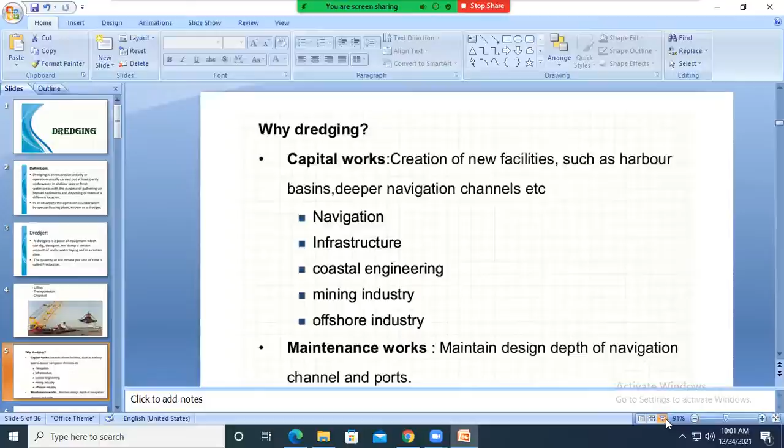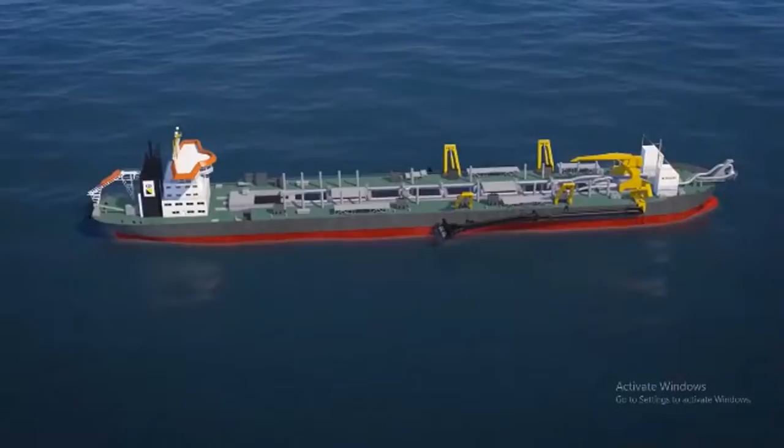The trailing suction hopper dredges of Boskalis are ocean-going vessels that can collect sand and silt from the seabed and transport it over large distances. Boskalis deploys trailing suction hopper dredges for the construction and maintenance of ports and waterways, as well as land reclamation, coastal defense and riverbank protection. Trailing suction hopper dredges are equipped with one or two suction pipes ending in drag heads. When a vessel reaches the dredging location, it reduces speed and lowers the suction pipes to the seabed. The drag head moves slowly over the bed, collecting the sand like a giant vacuum cleaner. A mixture of sand and water is pumped into the hopper of the dredging vessel. Dredging stops when the maximum hopper capacity is reached.

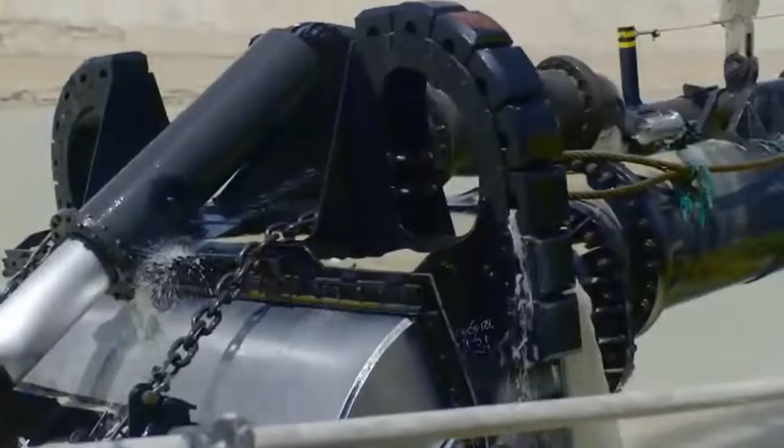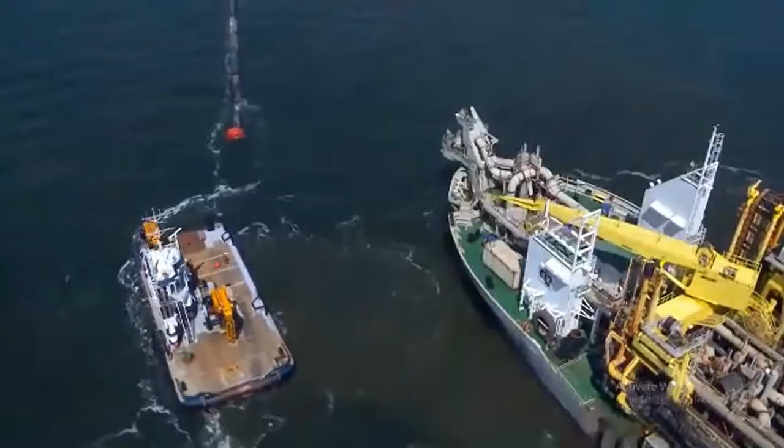The vessel can discharge its load in various ways, depending on the project specifications. The vessel can discharge its load by rainbowing. Rainbowing is used when the vessel can get close to the discharge location and the previously reclaimed sand body is above or almost above the surface. The sand is sprayed through a nozzle in the bow, rainbowing in an arch through the air. Another discharge method consists of pumping the sand ashore by floating or sunken pipelines. This approach is used, for example, in land reclamation or coastal protection projects.

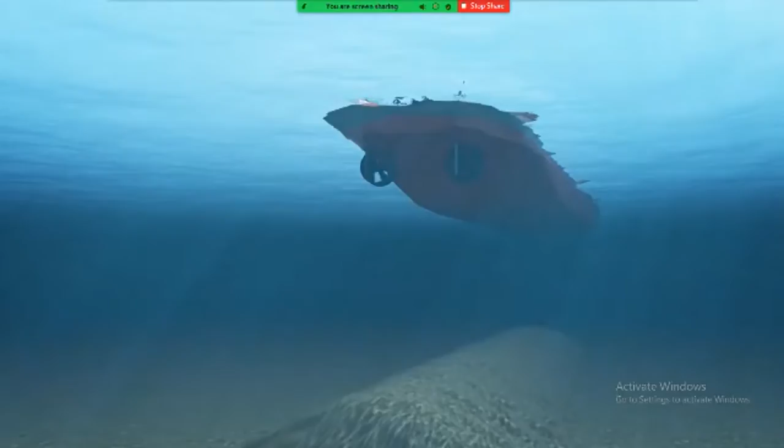The sand is pumped through floating pipelines into the reclamation area. The sand can also be deposited through doors located in the bottom of the vessel. Accuracy is achieved by maneuvering the vessel precisely above the designated location. Boskalis has a large fleet of state-of-the-art trailing suction hopper dredges operating on projects all over the world.

If we compare the roads we drive on to shipping channels, maintenance dredging is equivalent to repairing the road for safe traffic movement. Capital dredging is equivalent to creating road expansions or overtaking lanes.

Dredging activity is regulated by Commonwealth and state governments. Maintenance dredging is usually performed annually and/or following a natural weather event which may have caused siltation, while capital dredging is triggered by demand to expand existing channels or create new ones.

Dredging can be carried out in a number of ways. However, the most conventional dredging equipment includes the trailing suction hopper dredger and the cutter suction dredger. Like a vacuum, the trailing suction hopper dredger is self-contained, taking material from the seabed into the hopper and transferring it to the placement site.

This dredger is typically used for maintenance dredging. The cutter suction dredger, however, is a bagless vacuum which pumps the material directly from the dredging site into the placement area via pipelines. Placement areas vary depending on the dredging type: capital dredging is placed on land, while maintenance dredging can be placed at sea.

In addition to enabling the safe passage of vessels and facilitating trade, which enhances the economy, dredging has allowed GPC to undertake land reclamation, providing the community of Gladstone with Spinnaker Park, the marina, and East Shores, as well as future potential port development land.

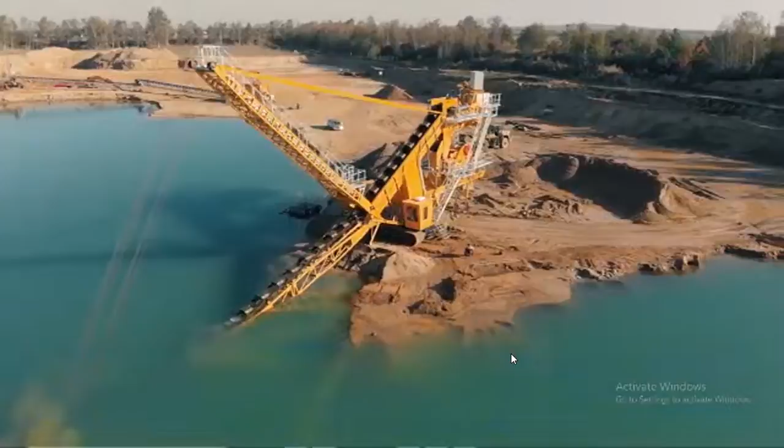Bucket ladder dredging has a series of buckets mounted on an endless loop.

What bucket ladder dredging does is cause the bucket to travel downward in such a way that it scoops material from the bottom and carries it in upright buckets up the ladder to the top. At the top, the bucket rotates into an upside down position and the contents fall into the chute.

Dredging helps in making the water navigable and makes fishing easier, even in shallow creeks. It helps in removing contaminants from the waterway and recreating a damaged area through reclaim work.

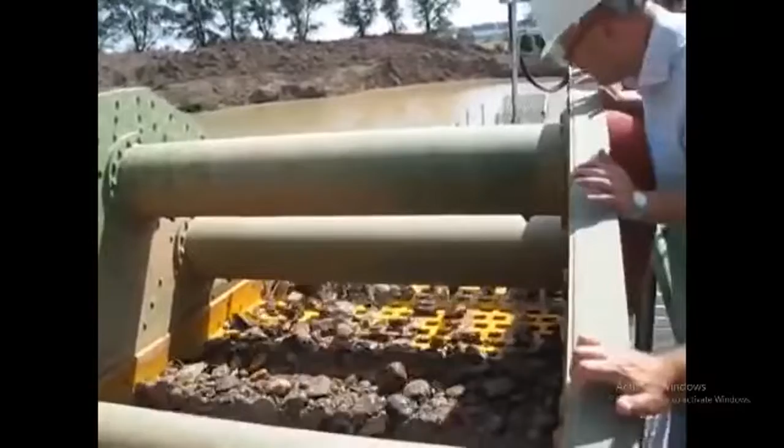Dredging ladder is a floating device for underwater excavation, meaning ladder dredging employs a continuous chain of buckets rotating around a rigid adjustable frame called the ladder.

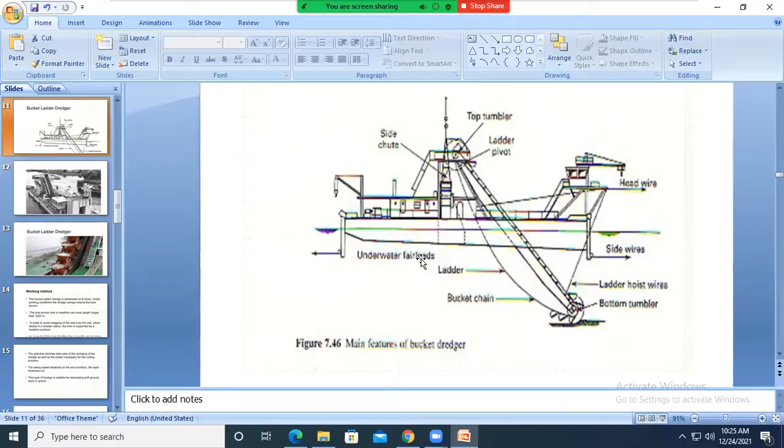How does the bucket dredger work? The loop of the bucket ladder dredger is powered, causing the bucket to travel up and down in such a way as to scoop material from the bottom, then carry the material in upright buckets up the ladder to the top. At the top, the bucket rotates into the upside down position and their contents fall into the chute.

This is the main bucket ladder dredger.

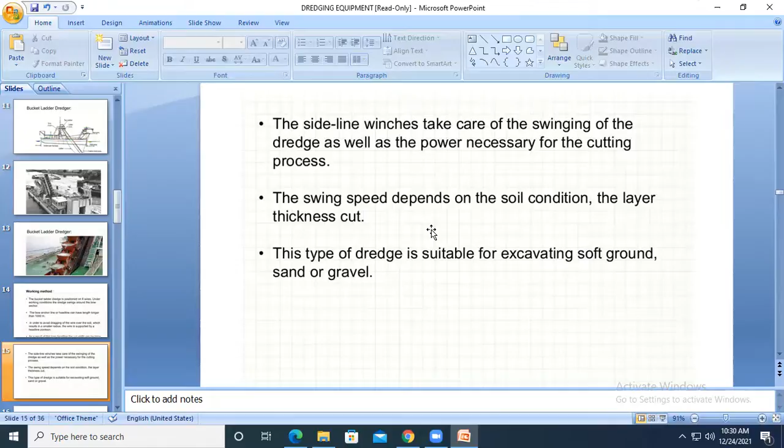Main type bucket ladder dredging capacity - the size of the bucket is usually in the range of 100 to 900 liters. Bucket ladder dredgers in this range are available for dredging almost any material up to the point where blasting is required, and may be fitted with ripper teeth to be able to directly dig into rock.

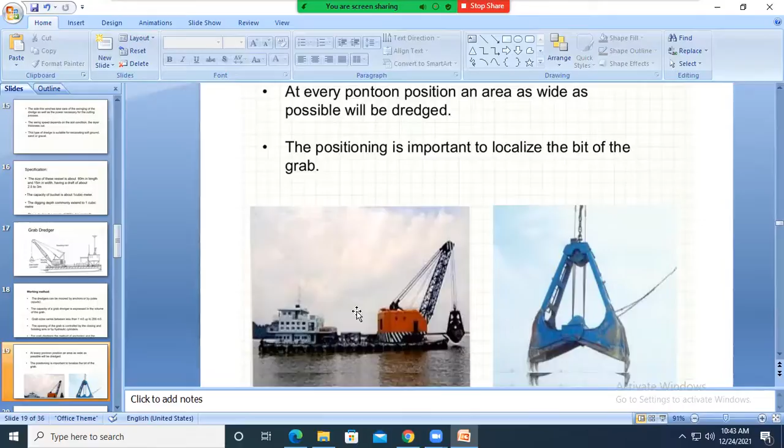At every pontoon position, an area as wide as possible will be dredged, means the position is important to location. This is the main part of the grab dredgers.

Main specification for grab dredgers: the hull is generally 30 meter to 60 meter long and 50 meter across the boom, which is generally 50 meter long. The capacity of grab dredgers is expressed in the volume of grab, so the main part for grab size varies between less than 1 meter cube to up to 200 meter cube. The opening of the grab is controlled by the closing and hoisting wire or by hydraulic cylinder.

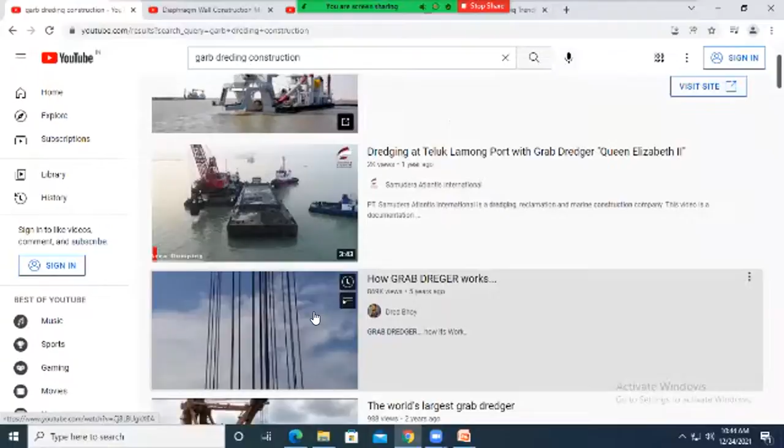Here is the main grab dredging construction animation, showing the grab digging process.

A grab dredger or clamshell dredger lowers, closes, and raises a single bucket by means of flexible cable. In operation, the bucket is...

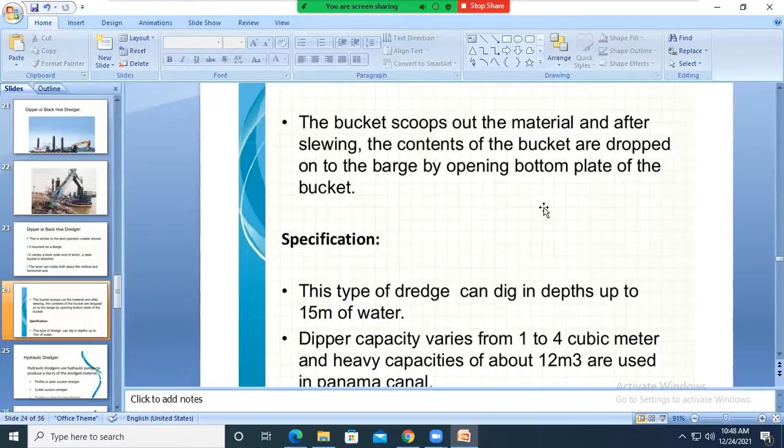Main specification for the dipper backhoe dredgers: this type of dredge can dig to a depth of up to 15 meter of water. The dipper capacity varies from 1 to 4 cubic meter, and heavy capacity of about 12 meter cube are used in the Panama Canal. Now, hydraulic dredger.

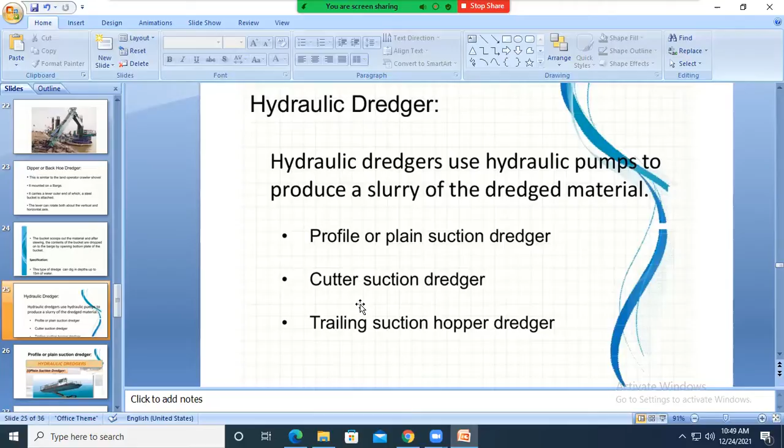Hydraulic dredgers use hydraulic pumps to produce a slurry of dredged material, meaning plain suction dredger, cutter suction dredger, and trailing suction hopper dredger. First, plain suction dredger, the hydraulic dredger type.

Plain suction dredger is the process.

Dredgers are equipped with a centrifugal pump for raising a mixture of soil and water to deliver the material into the transport system. There is a plain suction pipe and a suction head over the material to be excavated.

This type of dredger is well suited for free-running granular material. The working method for hydraulic dredger, meaning plain suction dredger, operates by sucking through a long tube, similar to a vacuum cleaner but on a large scale.

A plain suction dredger has no tool at the end of the suction pipe to disturb the material. This is mostly used for digging soft material.

Specification: the dredging depth is about 15 meter, with bucket capacity of about 6 cubic meter, used for soft material. A smaller bucket capacity of about 4 cubic meter is used for digging hard material.

Next, second type: cutter suction dredger, CSD. How does the cutter suction dredger work?

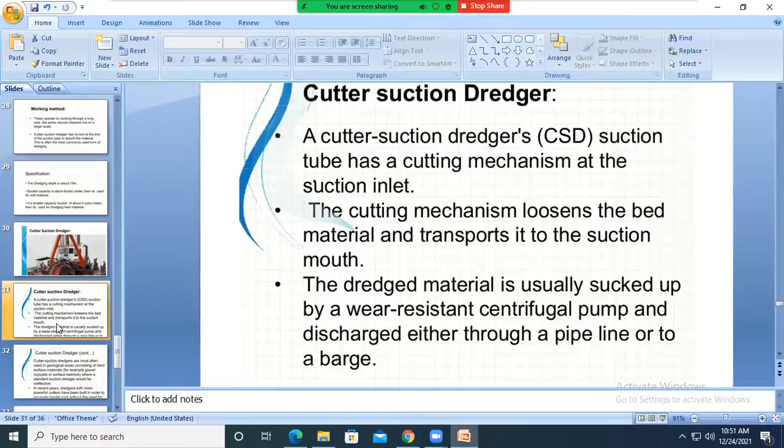Cutter suction dredgers are most often used in geological areas consisting of hard surface material, for example, gravel deposits or surface bedrock, where a standard suction dredger would be ineffective.

In recent years, dredgers with more powerful cutters have been built in order to excavate harder rock without the need for blasting. These are the main cutter suction dredger and plain suction dredger.

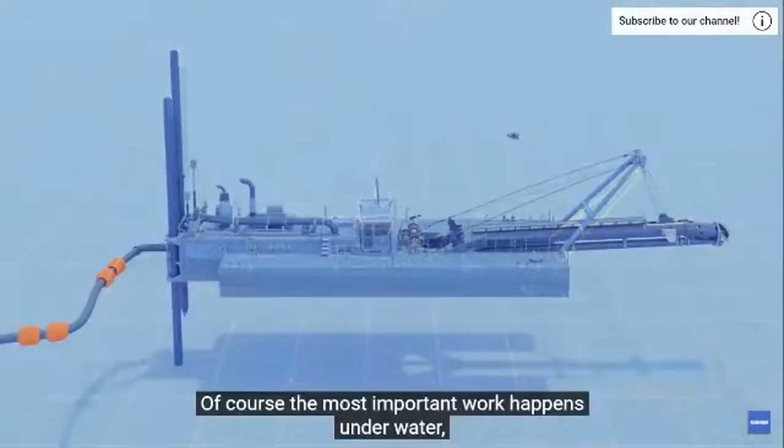Let's take a look. The most important work happens underwater, controlled by the operator from inside the control cabin. He starts by lowering the ladder. Now the cutter head can do its work, loosening soil from the bottom. A dredge pump sucks the loosened material through the suction pipe and discharges it.

Pretty simple, right? But how does the dredger move around to dredge an entire terrain? The CSD is designed to tackle this efficiently and very effectively.

The dredger is anchored on port and starboard, but contrary to normal anchors, these are not meant to keep the vessel still, but to move it from side to side. By controlling the side wire winches, the dredger swings from side to side, dredging the bottom without missing a spot.

The operator lowers a spud pole to create a center point of rotation for the dredger. After completing a cut...

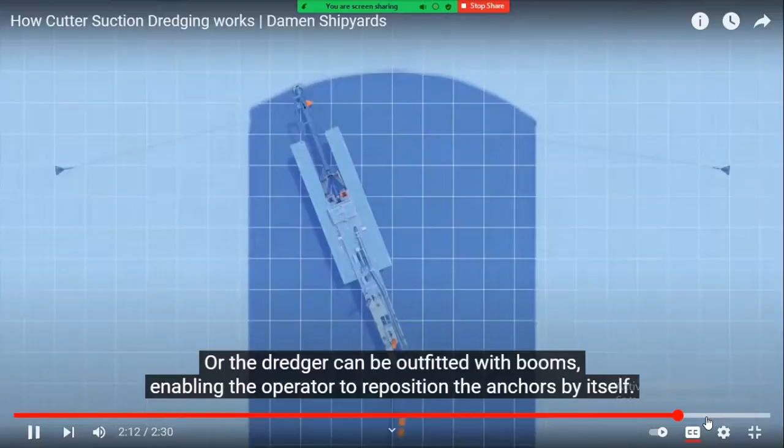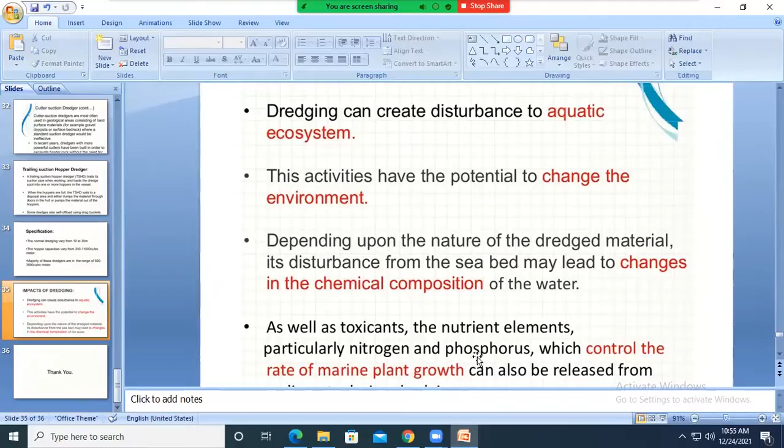Okay, last impact of dredging. Dredging can create disturbance to aquatic ecosystems, meaning this activity has the potential to change the environment. Depending upon the nature of dredged material, its disturbance from the seabed may lead to changes in the chemical composition of the water, as well as toxicants, the nutrient elements, particularly nitrogen and phosphorus, which control the rate of marine plant growth.

Floating equipment, meaning floating power station. What is meant by floating?

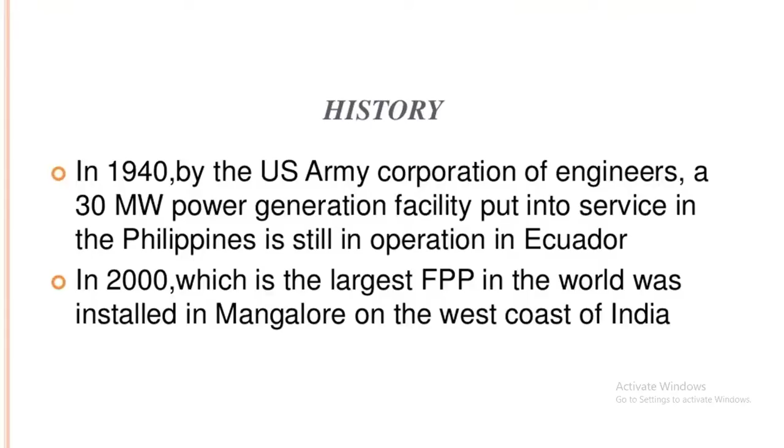Okay, main introduction of floating power plant. In history, the floating power plant in 1940 by the U.S. Army Corps of Engineers, a 30 MW power generation facility was put into service. In 2000, the largest FPP in the world was installed in Mangalore on the west coast of India.

Design consideration is such that operation is like a ship, only requiring fuel for the generating machinery. Fuel is limited in several countries.

One has to use available fuels with respect to cost. Fuel used in power stations, inland or at sea, mainly depends on availability and cost. This is power barge design.

Then barge operation, meaning operation can be carried out the same as land-based facilities. Then steps for transferring motor controlling switches, also installed on the barge.

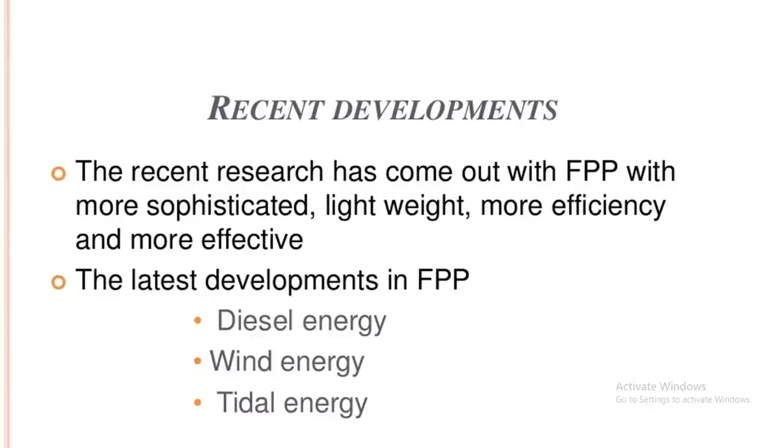Floating advantages: independent from soil quality, fast supply of electricity to areas with limited infrastructure, and provide additional safety in earthquake and flooding areas, with short delivery time where land space is limited; a large site area is not needed.

Disadvantages of floating: infrastructure is costly when working offshore, and access to installation is critical when working offshore.

Main conclusion of floating: there are various positive environmental impacts from construction of FPP, meaning it absorbs vital energy from nature, thereby reducing the use of harmful structures.

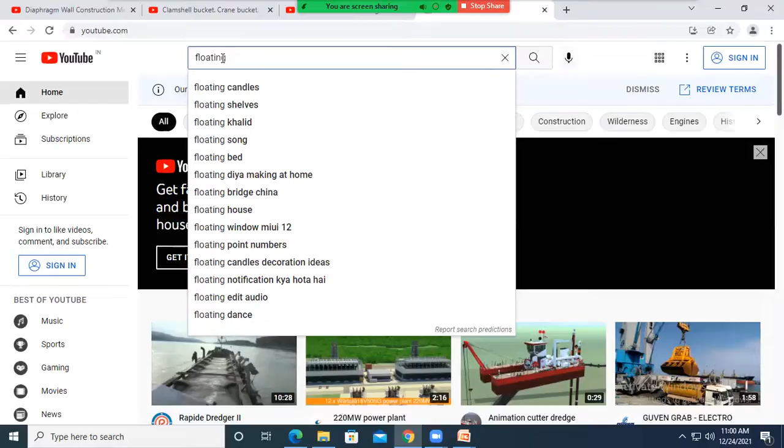Floating equipment. Float equipment. Construction.

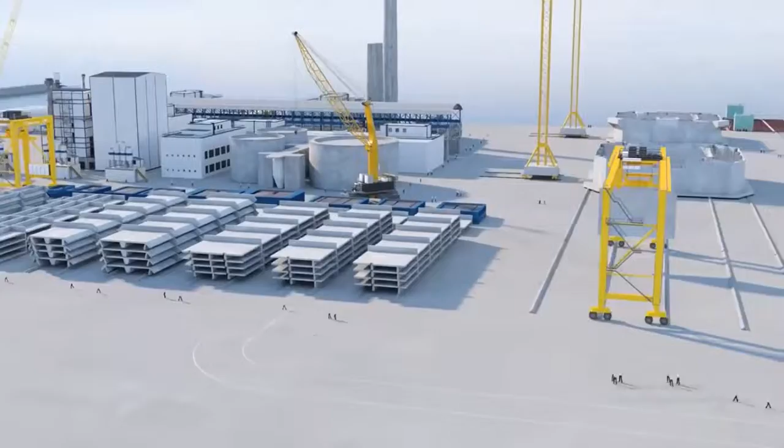Float equipment means the float shoes and float collars are simple in design and operation. They have been engineered and manufactured to withstand the high temperature and pressure created by different fluid columns when floating and cementing the string of casing.

Construction launching method operation is fixed. Okay, that is the main part for floating.

Next point, last point for diaphragm wall. What is the diaphragm wall method, its purpose, and construction method.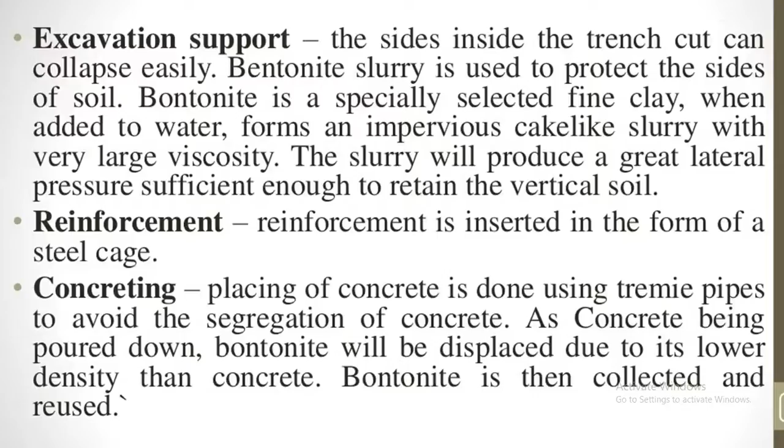When joining for diaphragm wall panel, it cannot be constructed continually for a very long section due to limitation in the size of the mechanical plant. The wall is usually constructed in alternative sections, meaning two steel end tubes will be placed at the end of the excavation.

Before concreting, the tubes are withdrawn at the same time as concreting so that the semicircular end section is formed. Wall sections are formed alternatively, leaving the intermediate section in between; these sections are built similarly but without the end tube. In the end, the continuing diaphragm wall is constructed with panel sections joined by the semicircular groove. This is the continuous process for diaphragm wall panels.

This is the forming of the guide wall used in the trenching operation.

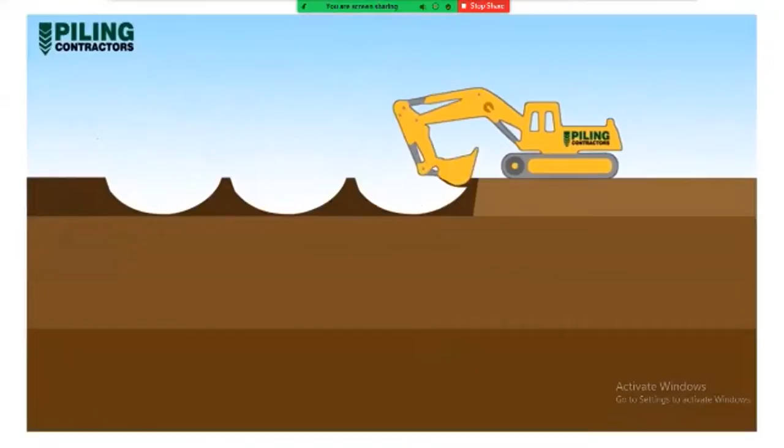A shallow guide wall is constructed first along the alignment of the proposed wall. The guide wall serves to locate the excavation equipment within acceptable tolerances before the retaining wall construction commences. The guide wall is made from reinforced concrete, typically 1 to 1.5 metres deep. Walls are constructed to tight verticality tolerance.

Excavation of the diaphragm wall is carried out in panels. A typical panel is excavated in 3 bites: a left bite, a right bite, and lastly removal of the middle dumpling. Bite widths depend on the grab type being used, but 2 to 2.8 metres wide is typical.

At the same time as the soil is removed from the panel, bentonite mud is pumped into the excavation to support the surrounding soil, preventing collapse into the excavated trench. Excavation continues until the bite reaches the designed depth.

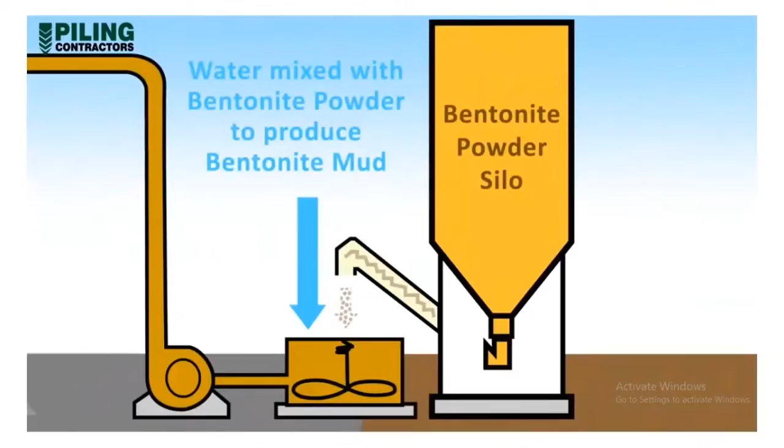Bentonite mud, or in appropriate circumstances polymer, is batched in an on-site plant, allowed to hydrate to gain full gelling properties, and is then used for temporary excavation support. Typically, bentonite powder in bulk or bagged form is added to water and rapidly mixed in a colloidal mixer to produce the desired concentration of bentonite mud.

The mud is usually pumped to a storage tank where it hydrates for up to 12 hours. The bentonite particles swell and absorb the water before it's used to support the excavation. When required, the hydrated mud or recycled mud, or a mix of the two, is pumped to the excavation trench to replace the excavated soil, maintaining a constant head of mud above the prevailing groundwater levels.

Excavation of the panel continues, generally completing the left and right bites before removing the centre bite. Then the centre bite is excavated down to the required panel toe level.

Steel or precast concrete stop ends are placed at the edges of the excavated panel. The stop end may contain a rubber water bar that later becomes embedded into the concrete. The water bar minimises water ingress between panel joints once the earth is excavated inside the diaphragm wall.

A prefabricated reinforcement cage is then lowered into the excavation between the stop ends. Blockouts for floor slab connections, ground anchors, or other penetrations can be formed in the reinforcement cage.

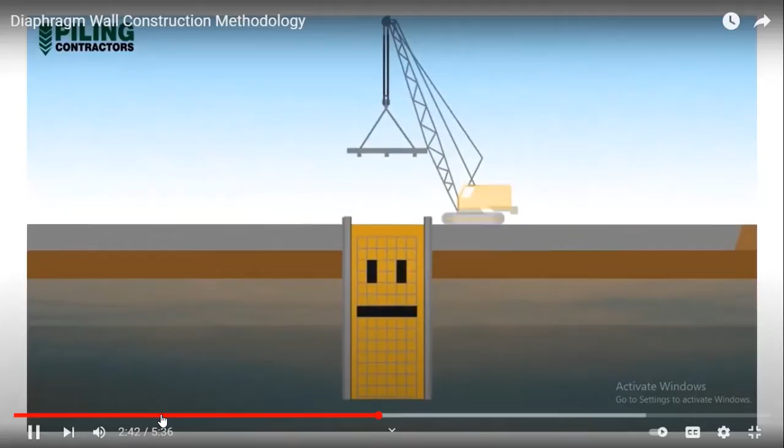Concrete is poured into the excavation using the Tremie method. This is achieved by use of a hopper and steel tube extending to the base of the excavation. Typically, 2 hoppers are used for a 6-metre wide panel.

The hoppers and tubes are charged with concrete. Then the tubes are lifted off the bottom of the excavation so that the concrete flows out, displacing the lighter bentonite mud upwards. The bentonite is pumped back to the recycling plant as it's displaced.

As the concrete level rises in the panel, the Tremie tube lengths are shortened to ensure that fresh concrete is always closest to the concrete-bentonite interface. When the concrete rises to the required level, the Tremie pipes are removed and the concrete is allowed to set.

The first panel constructed in a run of wall is called the primary panel. The main purpose of diaphragm walls, as underground structural elements, is commonly as a retention system and permanent foundation wall. They can also be used as groundwater barriers.

The next excavated panel. How is the diaphragm wall installed? Diaphragm walls are constructed under a support fluid, usually bentonite slurry, and excavated using rope clamshell grabs, hydraulic clamshell grabs, and hydromill cutters, or a combination of all three. The choice of system depends on the geology, hydrology, and depth purpose of wall requirement.

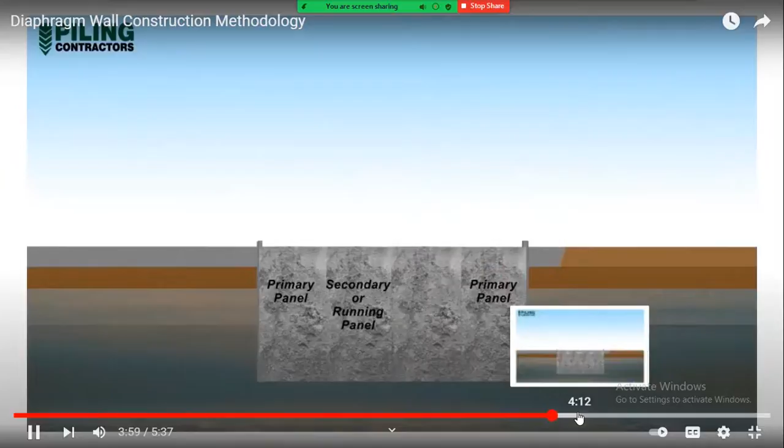Excavation is completed and concreted in the secondary or running panels. The final panel concreted in a run of wall is termed the closing panel, as this panel closes up the length of wall. The stop end is removed from one panel during excavation of the adjacent panel.

This equipment is mainly used for the grab body to provide a high degree of diaphragm wall verticality control during installation. The hydraulic grab has hydraulically operated closing jaws and is able to exert considerable closing force to excavate dense sands, stiff clay, or weak rock material. These grab bodies can also include steering mechanisms.

This is meant for diaphragm wall construction.

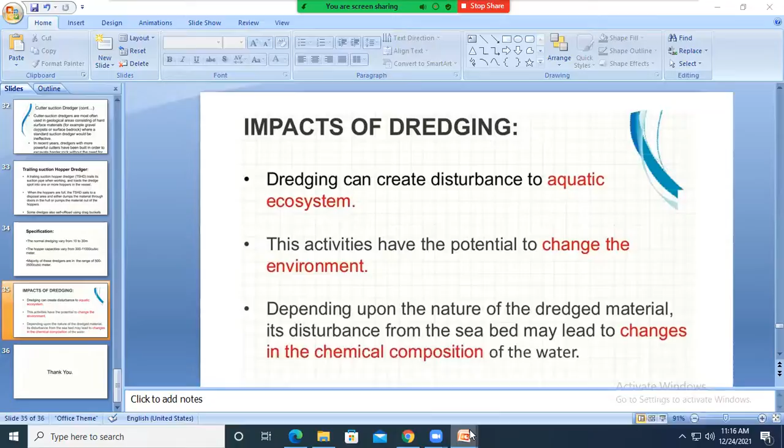Using Hydrofraise means reverse circulation trench cutter to form the diaphragm wall panel.

Bore piles of square section can be installed using the Hydrofraise or similar drilling techniques. The bore hole is stabilized by drilling mud. The Hydrofraise is a drilling machine powered by three down-the-hole motors operating with reverse circulation.

A heavy metal frame serving as a guide is fitted at the base with two cutter drums carrying carbide-tipped cutters. These rotate in operation and break up the soil, and a pump is placed just above the drums to carry loose soil up to the surface via drilling mud. The mud with cuttings is continuously filtered and pumped back into the trench.

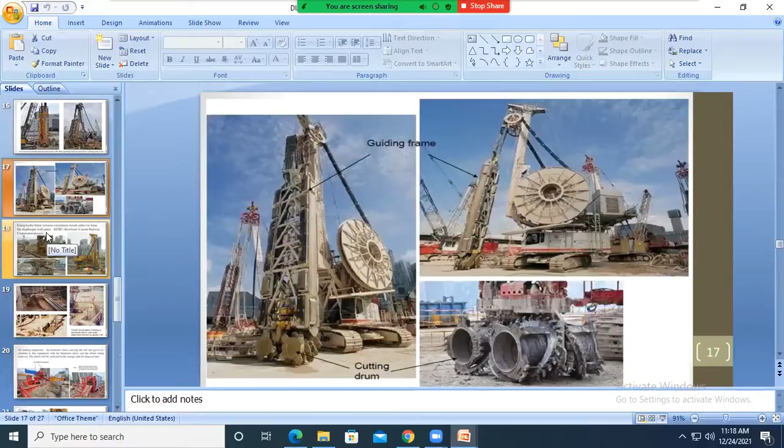The main parts of construction guide: how to construct a diaphragm wall involves construction of the guide wall, excavation of the panel, and wall concreting.

The guide helps construct diaphragm walls of rectangular section in situ under the soil, forming an underground concrete wall. These walls are constructed panel by panel, each interlocked to ensure stability and water tightness.

Diaphragm walls can range in thickness from 60 centimeters to 1.5 meters, with widths of 2.2 to 3.5 meters, and can be constructed to a depth of 60 meters or more. The construction process involves the guideline and excavation panel, which helps avoid soil collapse, mark the panel position, and support the reinforcement till placement.

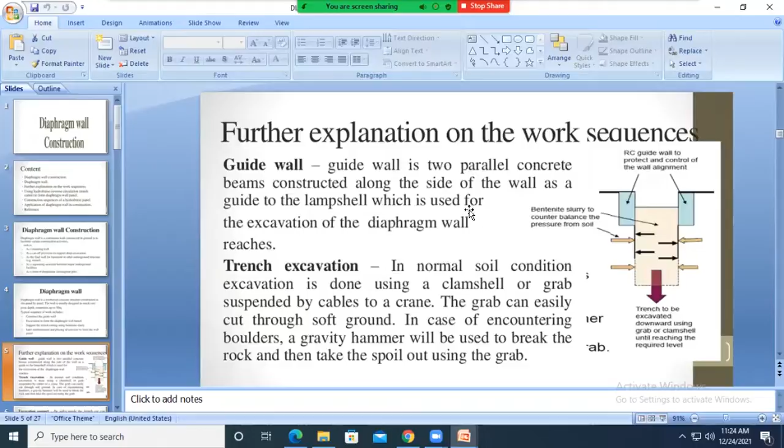Guide walls are reinforced concrete whose top should be at least 4 feet above the groundwater table to allow construction in dry conditions. Then trenching: pre-trenching is performed to remove shallow obstructions and provide stable support for guide walls. This performs open excavation, backfilled with flow fill, excavated under self-hardening slurry.

Panel excavation means excavation performed using a special clamshell, also known as a grab bucket. It has a rectangular shape and is used to excavate vertical slots known as panels. The digging mechanism may be cable or hydraulic operated, and excavation is performed in panels arranged in vertical segments.

Trench stability is mostly provided by the weight of the bentonite slurry and the arching action of soil around the trench. The slurry is placed in the trench and maintained at least 3 feet above the groundwater table, within 2 feet of the top of the guide wall.

Reinforcement is inserted in the form of a steel cage, and concrete is placed to avoid segregation. In tremie concreting, pipes are placed at the panel bottom and concrete with 8 to 10 inch slump is tremied into the panel.

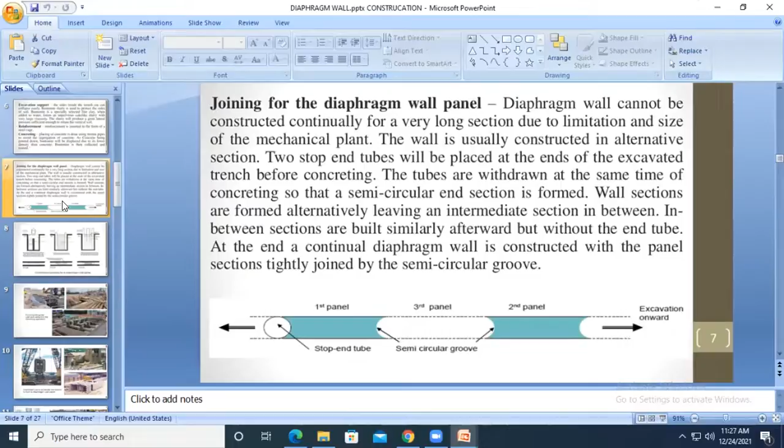This is the main type of diaphragm wall.

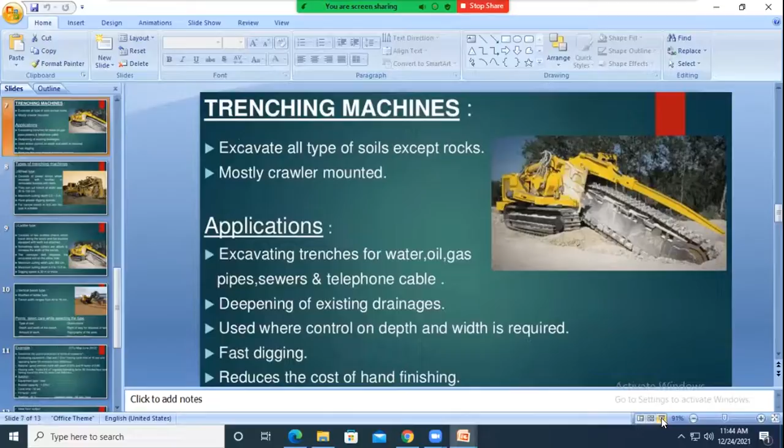Main types of trenching machines, there are different types for trenching machines.

Finally, a trencher is a piece of construction equipment used to dig trenches, especially for laying pipes and electrical cables, for installing digging or preparation of trench work. Trenches may range in size from walk-behind models to attachments for skid loaders, tractors, or very heavy tractor equipment.

Main uses: what are trenching machines used for? Trenchers are pieces of earth moving equipment. They use a metal chain and teeth made of high strength steel to rip into the ground like a chainsaw cutting wood into trees. Similar to an excavator, the trencher rips up the soil and any roots in the way to create a trench.